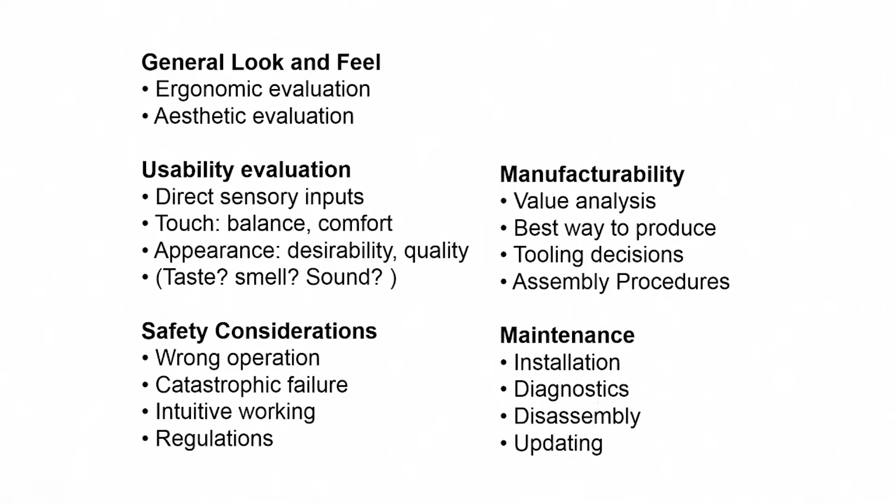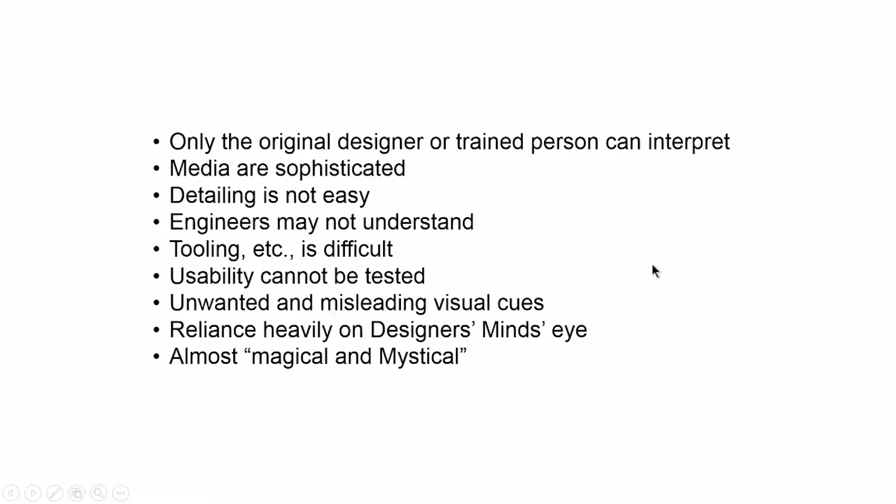So, how do you disassemble parts, how do you update the system, and how do you diagnose this? For all these things, the best way is by manufacturing a prototype. And then we have rendering and all that. I will stop here and quickly go back to the interesting thing which I am sure quite a few of us are waiting for. This is the concept of 3D printing, which is a small subset of rapid prototyping. You see here I have a very interesting object, which is nothing but a peculiar heat sink.

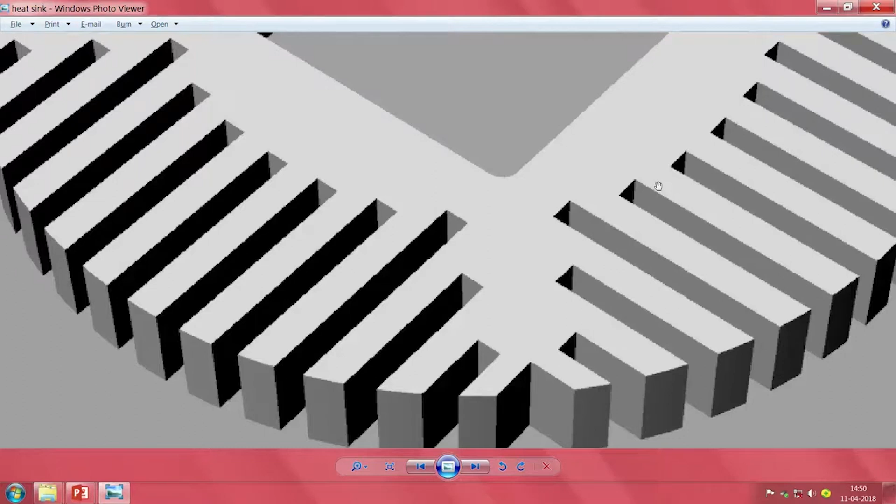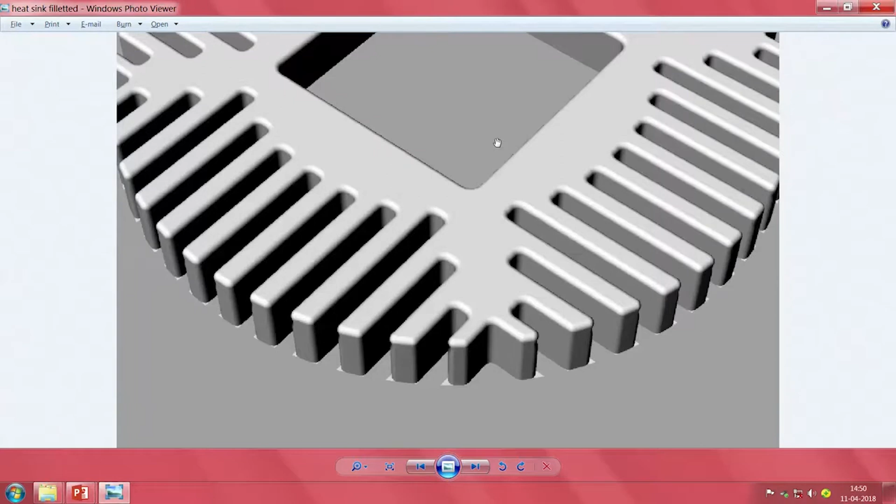If you see here, for it to be manufactured, it has to be held in different places, and a cutter has to move in all the directions, and this has to be ready. And from various considerations, I would like to have one in my hand, because it is not easy to interpret these things. While it looks okay here, such things suddenly made sense to be made in 3D printing. So, in 3D printing, that is typically a machine.

Let me go back to a few more parts. You see here, notice something about this clock. It is a 9 to 5 clock, and you see where the 1 o'clock is. This does not start at 12. Out here in colleges, we have a recess at 1 o'clock, noon time. So, the whole perception of the student is everything is before lunch and after lunch. So, 9 to 1 is all the sessions before lunch, and then after lunch is there, and suddenly you have noticed the other 6, 7 thing is not there at all.

Now, this was just directly printed on a normal printer, an A3 printer, and it is stuck there. Imagine I need to now make this clock, and you see some very interesting things are also written there, saying work smart, not long and hard. Long and hard makes sense in some other thing, at least the semantics of it. Working smart makes sense. Now, you see all the other elements, it is a 9 to 5 clock, and there is no minutes hand, there is only an hour hand.

Approximately if you look at it, it is just past 2. In this case it is not divided into 5 parts, it is divided into 4 parts. So, it is a quarter past 2. So, I can now print the whole thing. Just like I have the black and white printer here, I can feed it to a machine here, and eventually I can have a beautiful 9 to 5 clock, and 9 to 5 are normal working hours, and 5 to 9, of course, evening times people get a little bit of relaxation, morning they start running around, and there is work all the time.

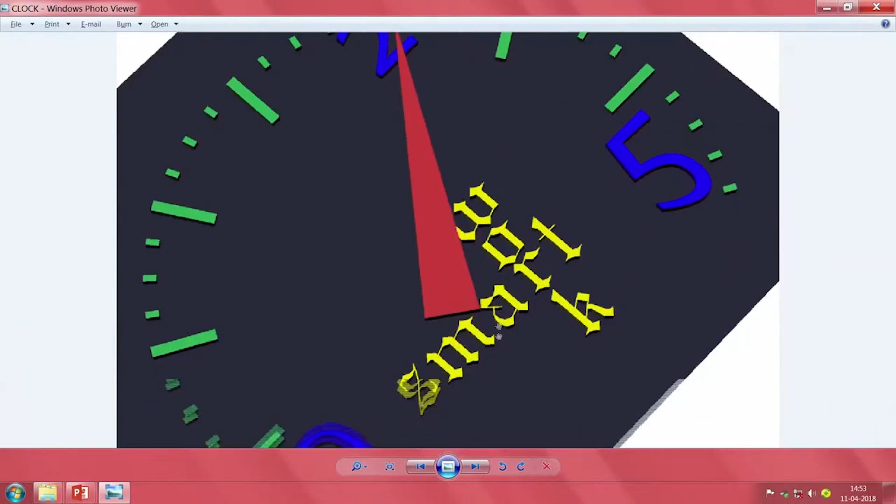Now, this whole device, including the colors, including the shape, including the fonts, everything can be designed in CAD and you can go ahead and print these things. So, I am amazed at it, as I just produced this as a student exercise.

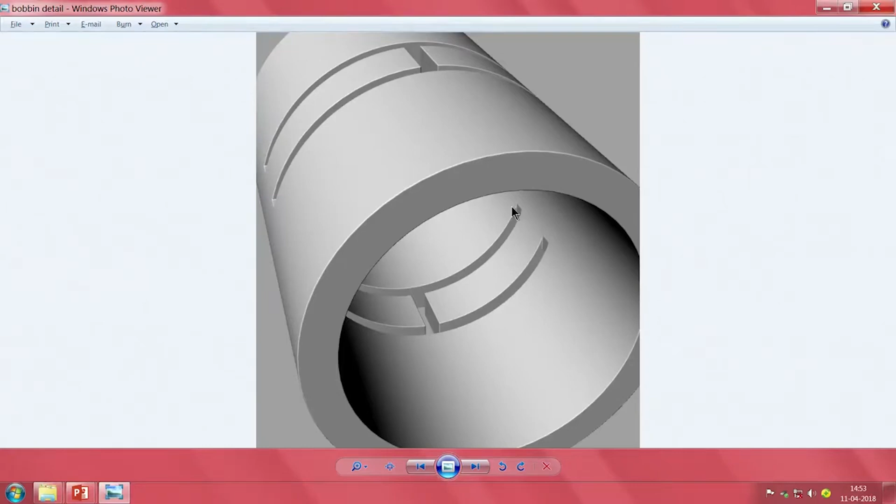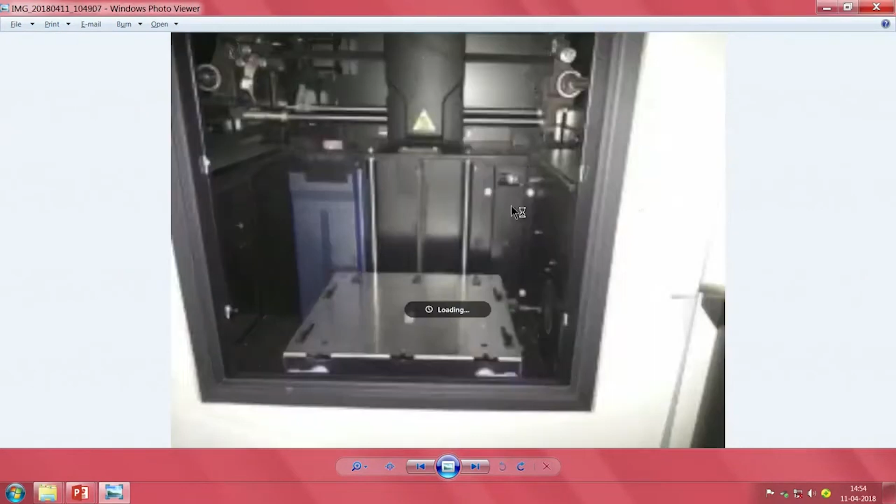And you see here I have some other part, I do not even know what it is, except that you see a small detail, there is a groove here, there is something here, and then this was supposed to be something for a shape memory alloy motor. So, if we electrically pass a current through the wire, it contracts and runs something. So, we have all these parts which can easily be produced using this 3D printing technology.

Typically, this is what you would have seen outside, and why I feel a little happy for getting this chance of being allowed to talk about 3D printing is we have been at it for quite some time. I first started using this machine around 10 years back, and for 6 or 7 years it has been with us. I will show you the samples we have put. This is a professional machine.

The advantage of a professional machine is it will take any drawing which you make, and the drawing formats are typically what standard software gives. One of the standard software is probably related to Autodesk, who started with the DWG format, and even earlier the Initial Graphics Exchange, IGES, system was also there. And the advantage is if I make a CAD model, it can be printed here, and the same file in principle can be used for carrying out other operations, the simplest being machining using a 3D machining center, either a CNC vertical or horizontal.

Now, slowly things have changed a little. Okay, let me get back to this simple thing. In principle, there is nothing great about this machine, but why this is costly I will give you an example later. There is a shelf here, we load the base here, and then there is a screw feed here. The screw feed keeps pushing it up in layers.

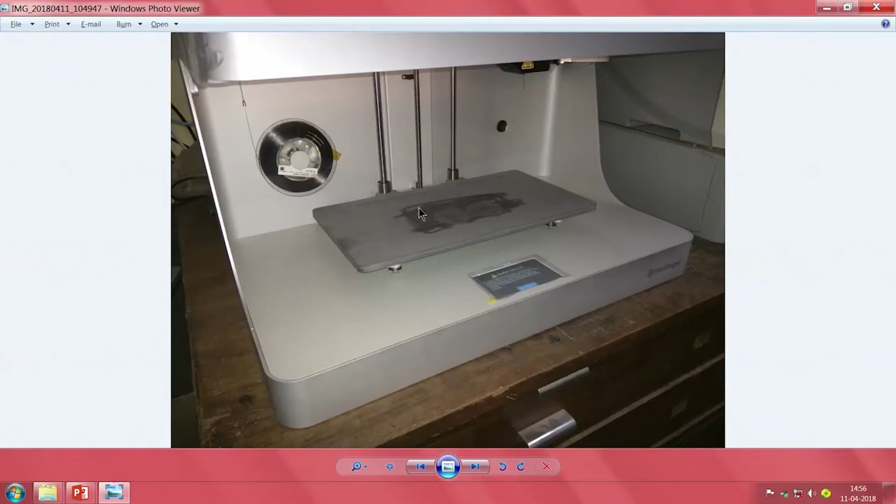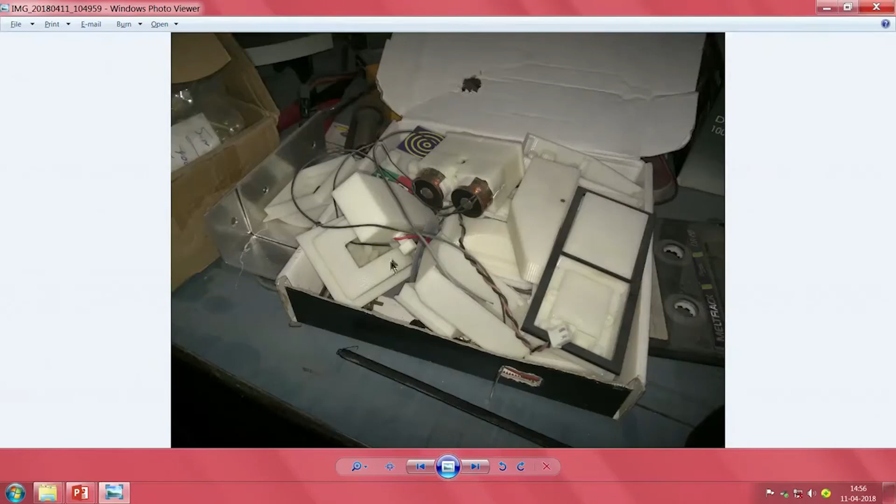Now, things have improved dramatically. You have seen here, this is the same machine 10 years later, the latest technology, it has become much smaller, and genuinely it is easy to fabricate these things. And you see these are all the parts that can easily be produced in a 3D printing setup.

There is actually part of a Fresnel lens. I will use the word Fresnel, put up with me, because even calling it Fresnel is probably not how the French call it. I do not know what it is. This is part of a Fresnel lens complex, and the next slide shows you,

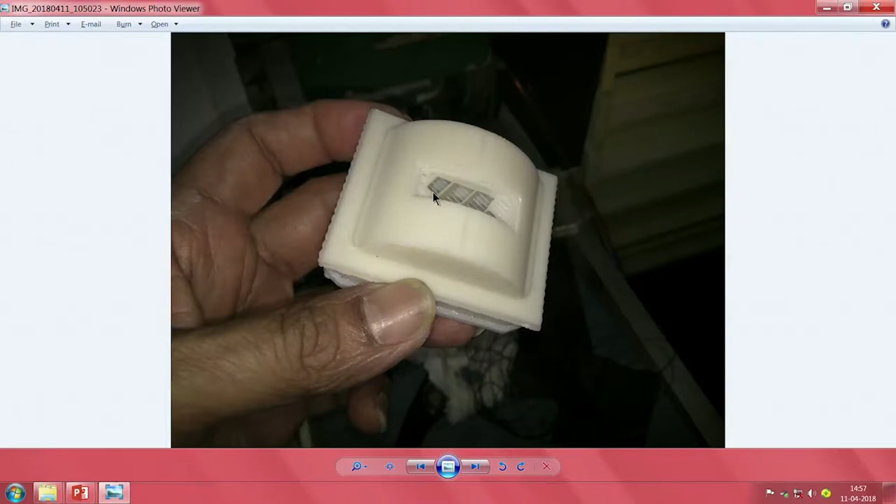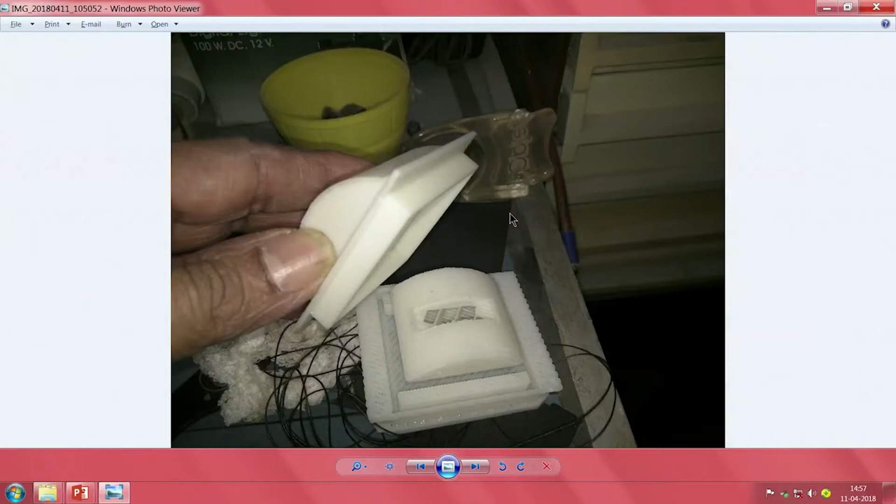we want it, you understand. We want this piece, it has a peculiar part of a sector radius, there is an opening here, and then this whole thing has to sit here and it has to come out of the machine. Now you see here, what I am holding in my left hand is the piece, right hand is what not many people tell you is the support material.

In the case of that professional machine, there is a poly, I think some acetate, allyl acetate or lactic acetate material which dissolves in water at a temperature which is lower than the basic other material. So, this build material, after having built it, we put it in that socket, and there is a small agitator and there is an ultrasound, and the whole thing comes apart, and then we take it out and we can use this part conveniently.

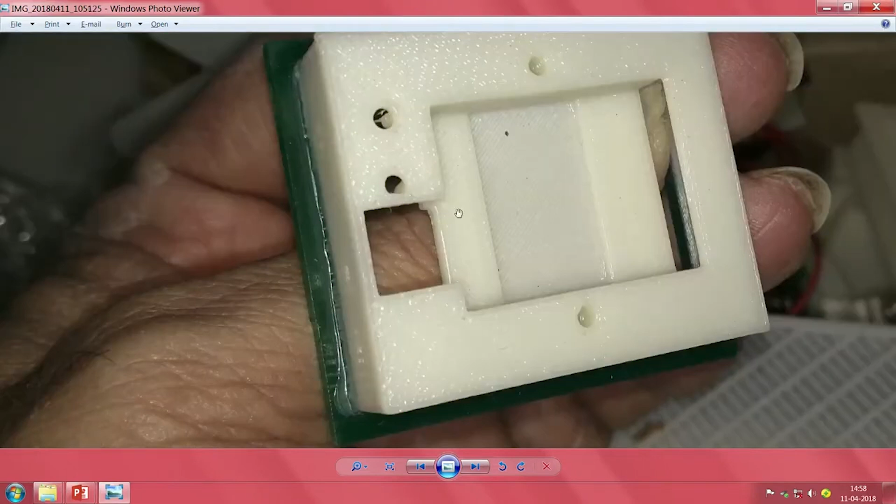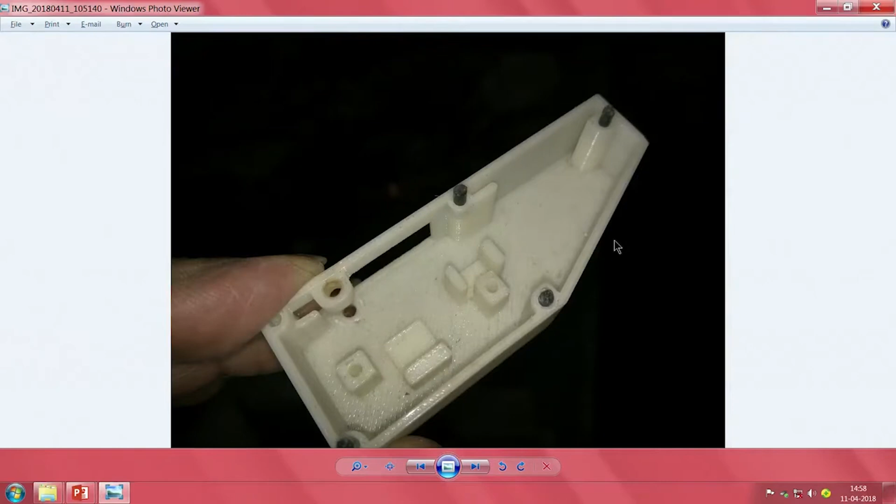Notice there is a little coarse build up here, and you see here same thing, the build up is a little fine. And you see something else here, this is the base on which it is printed. And this is where actually 3D printing became very, very popular.

Not long ago, around 15 years back, if somebody were to make a part like this and try to show it to an injection molder, it used to take ages. First of all, somebody has to convert what he has in his mind to a standard 3-view drawing. So, you have a plan view, an elevation and side view, several section views, plus something which not many people like, an isometric view.

Suddenly you need not worry about it. If you know a little about how to use any package, you can make this on the screen and print it immediately. A little romantic, but it is real. But you see here, how well all the small details, like small bosses, everything can easily be made here. This is one of those interesting things.

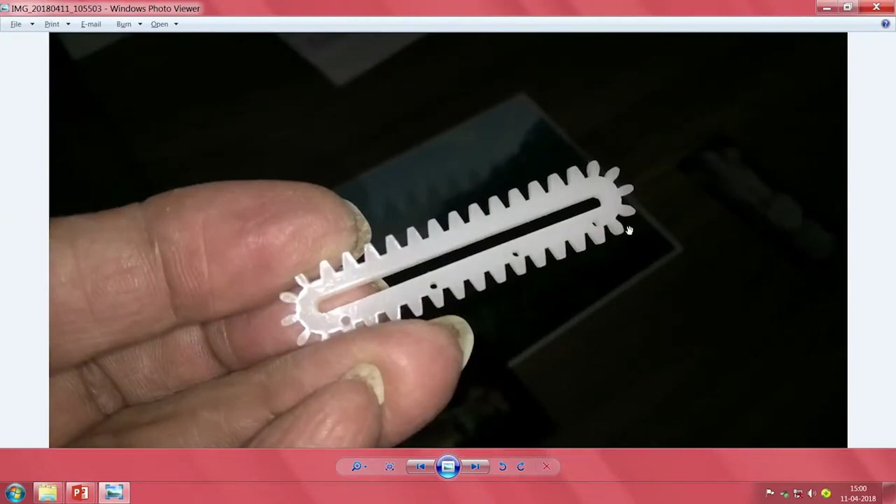A schoolboy wanted to make an ornithopter, but not using the standard Da Vinci's mechanism, saying why can't you use gears and other things. So, when he asked one of us, we said, okay, you tell us what you want and we will print it. There is a perfect, true to form involute gear.

This whole thing is a rack section. What you see here is a pure rack, they are tapered like this, and then slowly as you go here, now you see the full involute tooth profile. This was only possible by generating the form in CAD and then printing it using the fused filament method. So, in a way I am happy, and I do not know what has happened of him. And in the initial stages this became very, very popular.

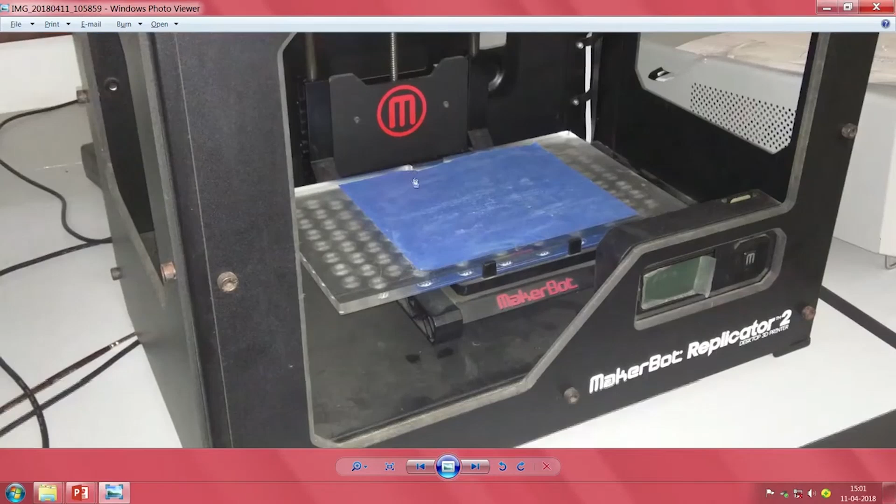I am sure all of you will know this symbol, and I will acknowledge this. So, we have the original MakerBot. MakerBot genuinely brought this to our attention.

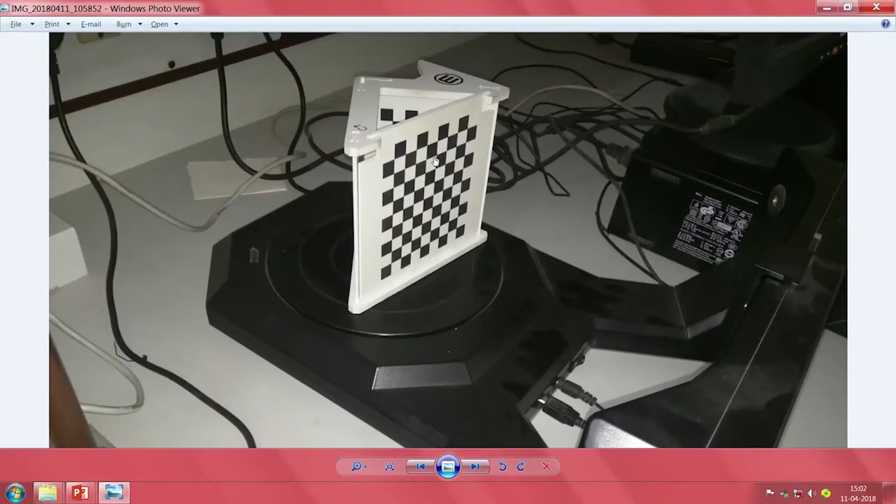But if you want to make a replica of something, first of all you need to do something. This is the device which is the scanner. So, you keep something, I think this is a MakerBot target they have given for the linearity and all that. It rotates and any object you keep on it can be converted into a 3D file.

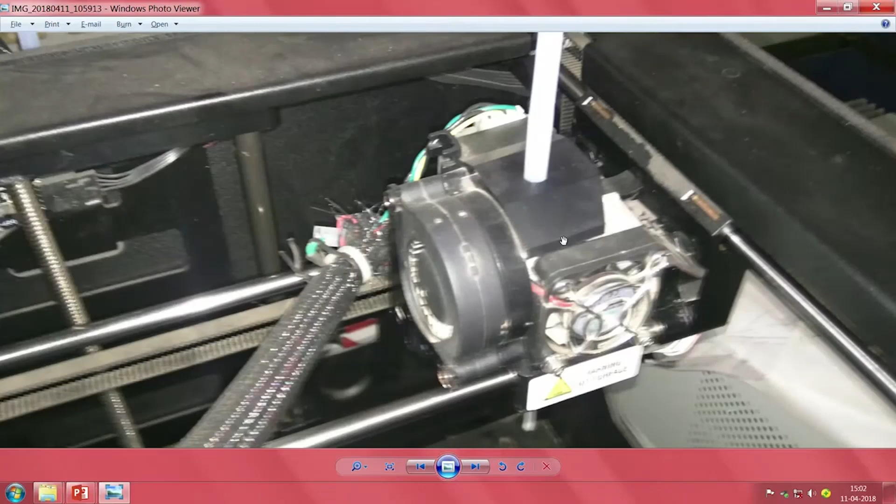Format I will not say right now; printing format is STL, otherwise it is a file. So, suddenly we are in beautiful company, and the crux of the whole thing is what I had told you earlier. It is a lot like a hot melt glue gun. So, you have the build material flowing here and then you have a nozzle at the bottom, and this nozzle sort of moves everything around.

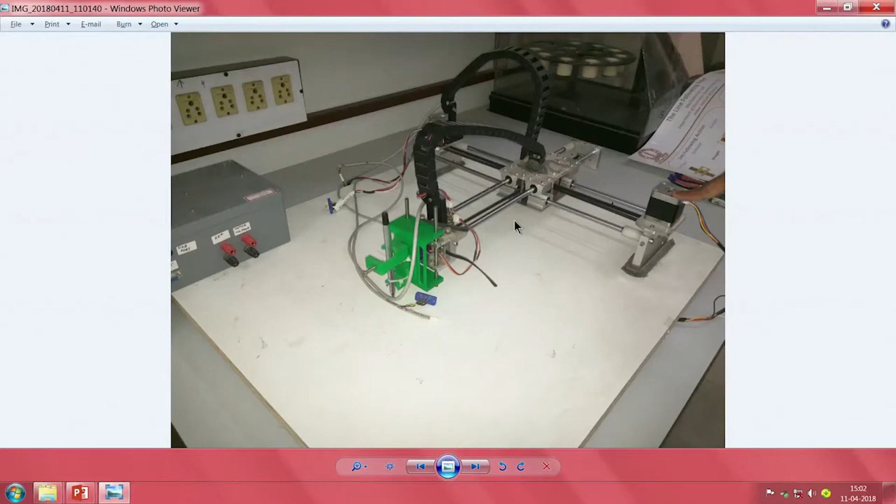I will come back later to the actual mechanism, but if you see here, the whole crux of the whole thing is an XY table. That is all there is to it. If you can make an XY table, you can make your own 3D printer. So, this is taken from one of our students' work, and you see there is a head here. This is used for various things. In this case, they have just used it as a calligraphy pen. If you have a font, that pen writes it for you.

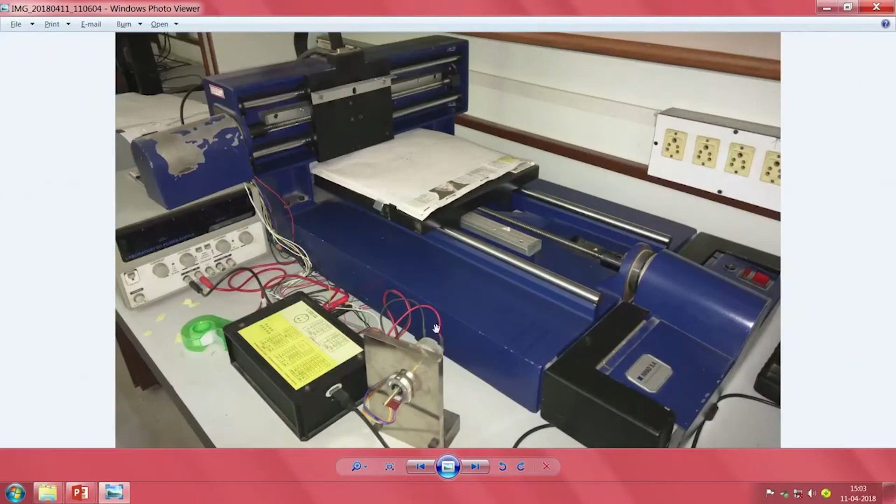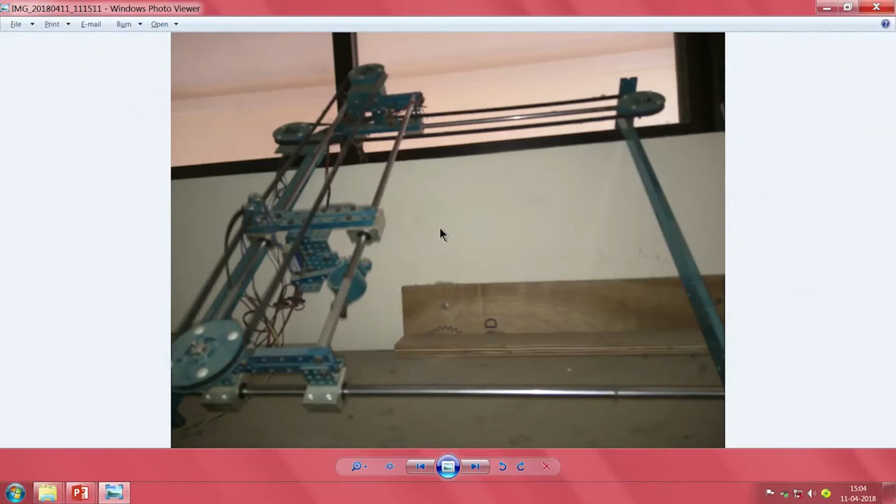And it is not as if anybody invented it. The XY table is an old thing. This is taken from a type of Gerber plotter which has been used for making printed circuit negatives. So, it has been there. To make it short, I will show you. This is even simpler. It is a kit. You have two motors, it moves up and down. If you can have a vertical thing in layers, you can do it. And this is not a toy, it is a serious learning experience.

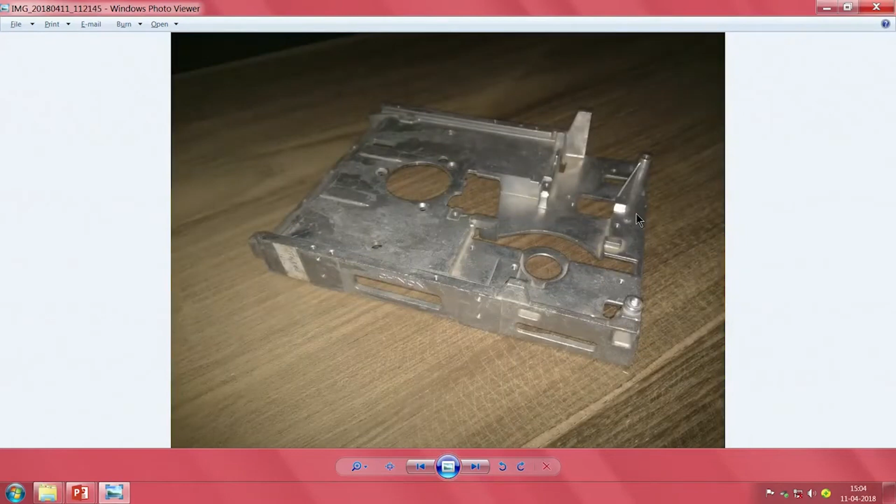So, I will just go a little forward, and things went on quite well, and I think some of you know where it is. Okay, this has come from one of the original floppy disks made out of non-ferrous casting. Probably it is a zinc aluminum casting, and you see the detailing and all. So, attempts have been made saying why can't we print all these things directly. And as things have progressed slowly,

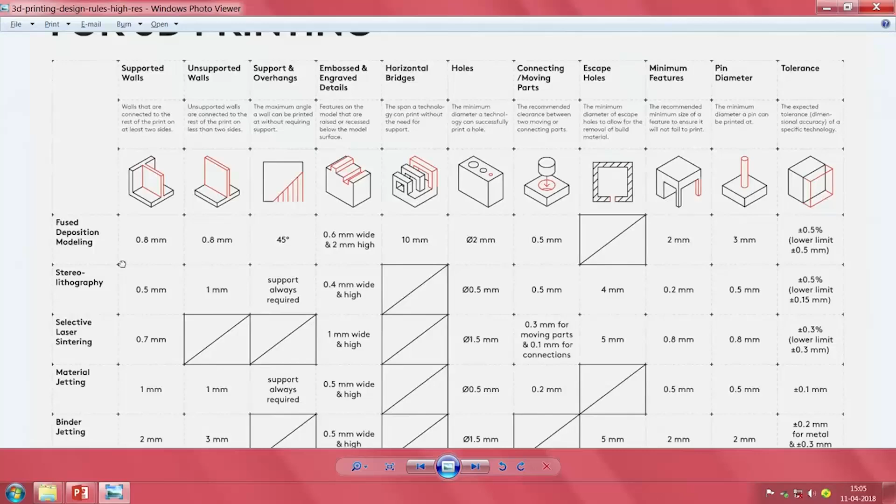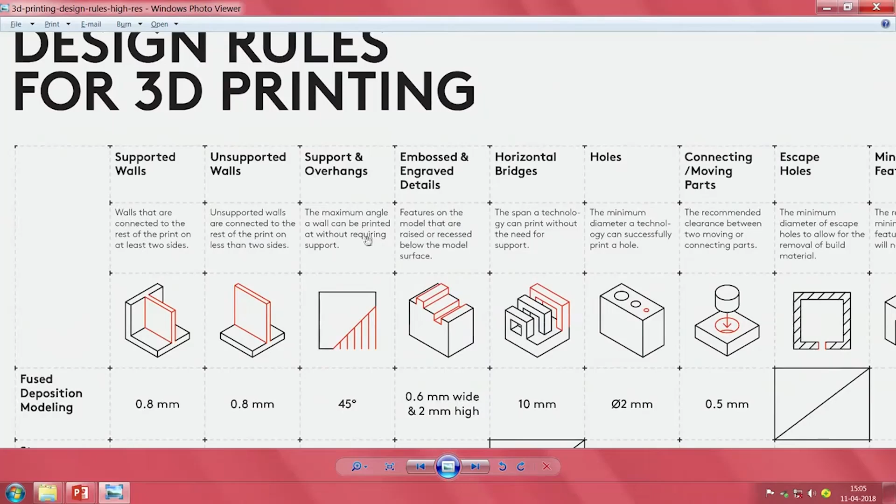the issue of design rules came about. You see here, at the extreme left position, we have fused deposition, stereolithography, laser sintering, material jetting, binder jetting and all that. It says how much should be the feature detail, supported walls, unsupported walls, overhangs and all this. These are actually not rules as much as guidelines. Depending on your interest, you can play around with it. And in the initial stages people did not know too much about these things.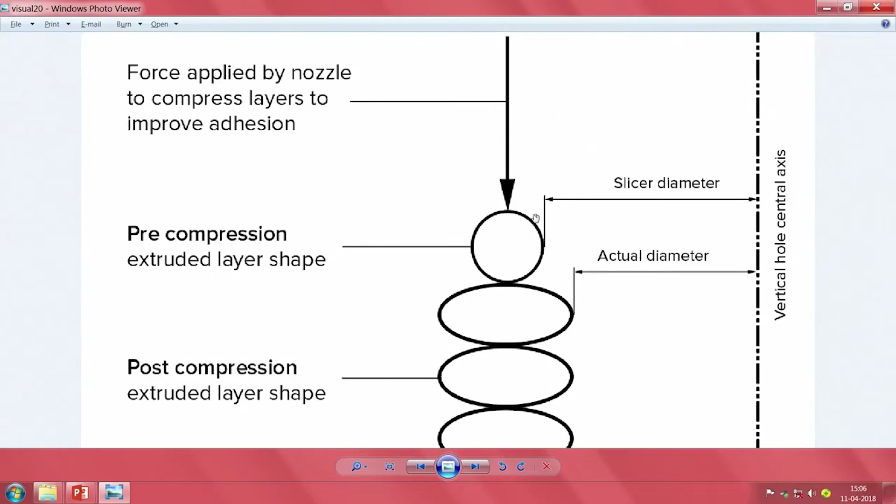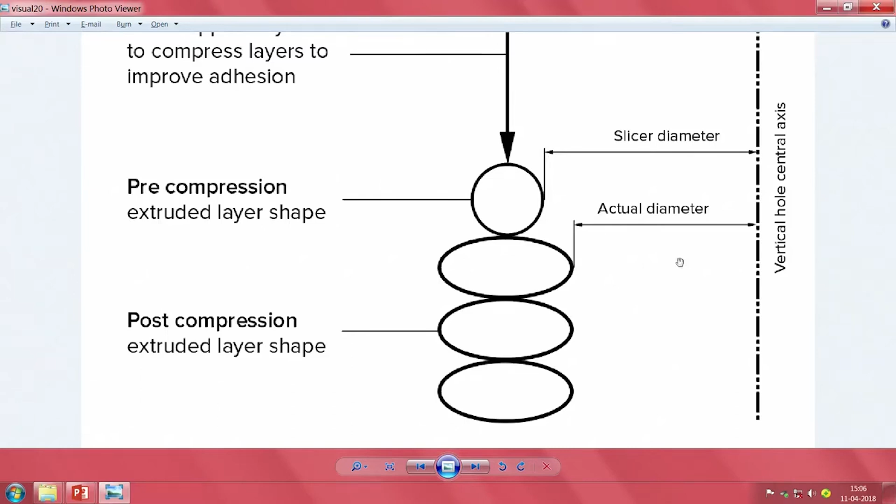Can you see here now? If you see, that filament, when it is fused and deposited, does not really build up as we think. You have seen here we have all this stuff: what is the layer shape, what is the slicer diameter, the actual diameter. There is still a lot to be learnt about it. I just showed it to you from a random thing. So, I thought I will just show you all these things.

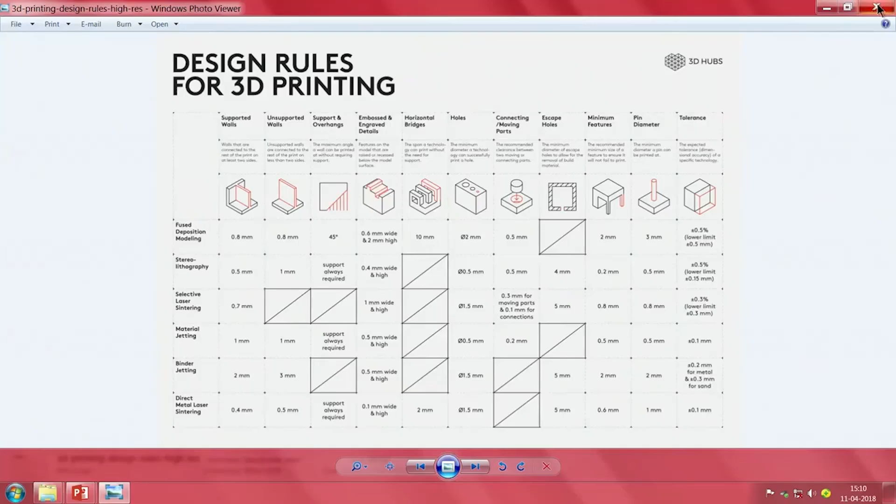So things have been made very conveniently, and we come into more and more interesting things, saying material is available directly on this design guidelines, saying how do you do plastic design. A lot depends on 3D printer resolution. What we assumed is automatic is not automatic, and it varies within parts.

I thought I will try to stress a little on things like spacing and clearances, interlocking volumes, piece assembly, and something related to tolerances, and how to deal with flexible plastics.

These have suddenly become very popular. Only thing you see in the commercial literature is saying, if you can think it, we can make it. And I wish things were so easy. It is not so easy. If you can think it, we can't necessarily make it. They are not at all that easy.